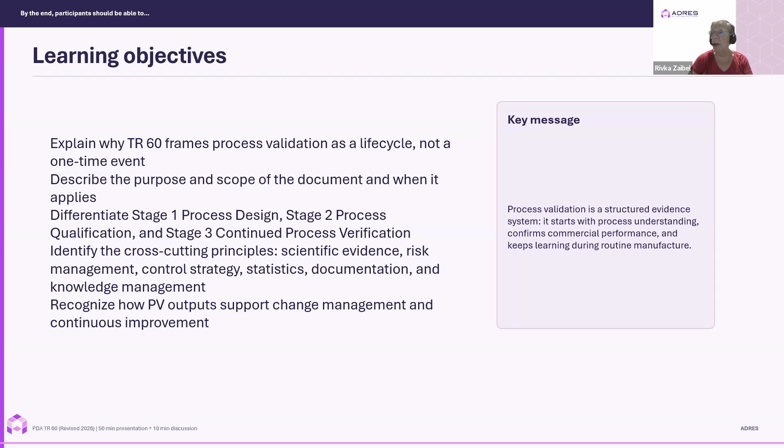So process validation is, as you know, a structured evidence system. It starts with process understanding, confirms commercial performance, and keeps learning during routine manufacture. Those who are working in startup companies are most probably in stage 1, and as you continue the development of your product towards the submission, the approval of the product, you will go through stage 2 and then to stage 3.

The main objective of the technical report is to provide the pharmaceutical industry with the most current guidelines available and summarize in a very detailed document the principles of process validation through the life cycle of the product. As a reader, you can find the most relevant regulatory requirements and expectations. You don't need to read all 162 pages of the guideline in order to get answers to your questions and needs at different points. So I, for instance, was interested to understand what the statistics section talks about. So I looked for that and reviewed it.

If you are in early stages, then you will benefit from reading the sections that are relevant to early stages and then continue through the entire process. Of course, in order to get the technical report, you need to be either a member of PDA or you can buy it online.

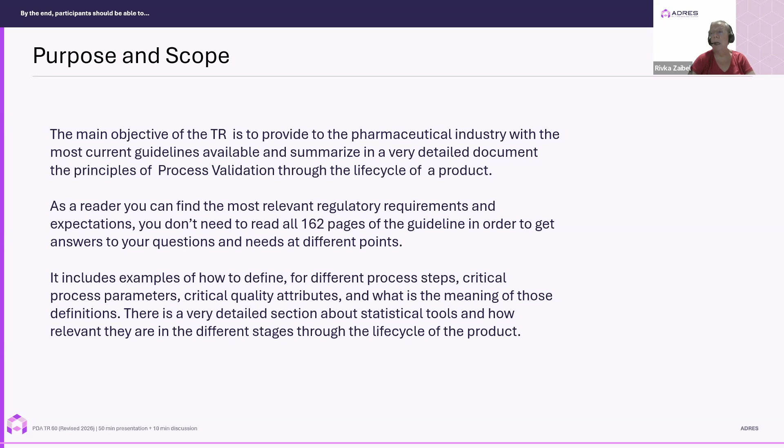There is a very detailed section about statistical tools and how relevant they are in the different stages through the life cycle of the product. So as I said at the beginning, it is the exercise which will be with you through the entire life cycle of the product. Here is a list of the documents which were summarized and that the technical report addressed, and they are the basis for this very detailed technical report.

As I said, you have here documents from the EU, like Annex 1. Those who work in aseptic processes are very familiar with Annex 1. We have the Annex 11, which is about computerized systems, and the equivalent FDA guideline, the 21 CFR Part 11. FDA guidance on data integrity and compliance, quality guidelines by the ICH, and we will see reference to the ICH guidelines through the entire document because that is really one of the main bases for this document.

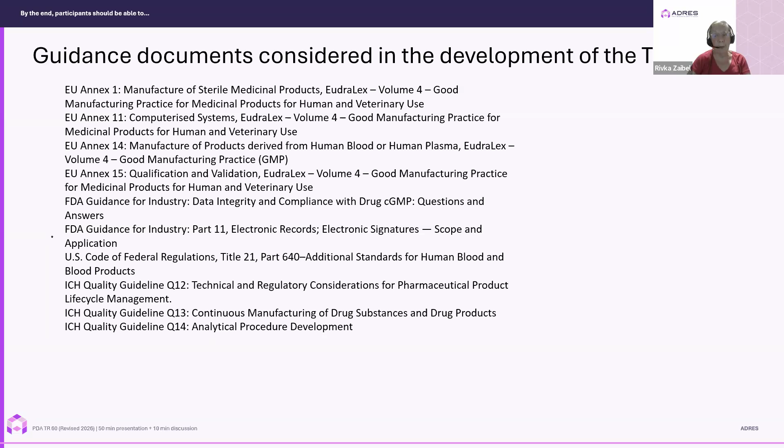So why does process validation matter? Why do we need to worry or actually understand what it is and what it says? So first of all, the regulatory expectation. EMA, FDA, and other regulatory authorities consider process validation an essential element in assurance of drug quality and link it to GMP expectations. Patient protection. What PV does is it connects process knowledge and controls to the ability to consistently deliver the intended product quality. And the business value: a life cycle PV creates a disciplined basis for innovation, improvement, and post-approval change.

So those that are in the industry, like myself, more than 30 years, we were used to the idea of 3 consecutive batches pass, that means that your process is validated. And actually that changed with the guidelines of the FDA and EMA in 2011, around that time, when they said 3 batches is not enough. 3 batches may give you an idea of the consistency of your process, but that is not enough in order to consider the process to be validated. And therefore, now we are moving to control and continuously verify the process.

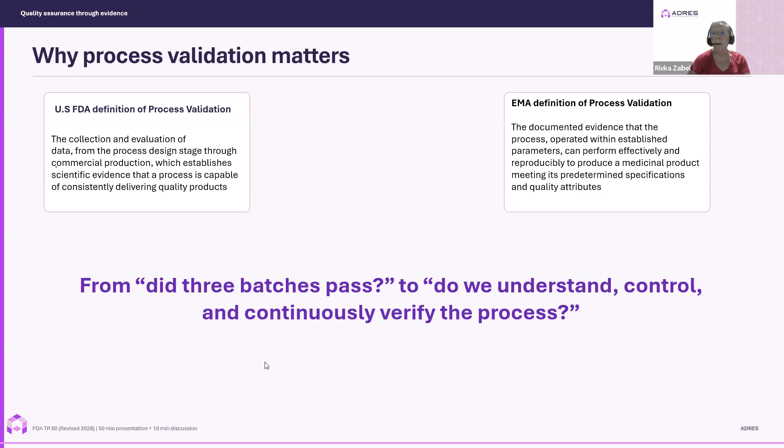And if we collect all the data through the development, the design stage, through commercialization of the product, I believe that we will be able at the end of the process to say, yes, I understand my process, I understand my product, I have the correct controls, and therefore I can move forward with the product to the market and ensure that that product will be safe to the end users, which usually are patients.

The purpose and scope of TR60 is it's a global reference for PV lifecycle, process validation, approaches for drug substance and drug product manufacturing. It applies to new and existing commercial processes. There is a section about how you apply the principles of process validation and continuous process verification to processes which were developed before those requirements existed.

And it applies to sterile or non-sterile pharmaceuticals, biologics, API, radiopharmaceuticals, veterinary medicines, and drug constituents of combination products. It is not intended to replace specialized validation guidance for ancillary operations such as cleaning, aseptic process simulation, or sterilization.

One of the things that we focus on when we assist a client to develop the process validation protocol and studies, we also add a list of what we call additional process parameters that need to be validated, which are not part of the typical process validation. For instance, as it is mentioned here, the aseptic process simulation, it's only relevant to aseptic processes, meaning a process in which you manufacture your product in aseptic conditions without having a final sterilization.

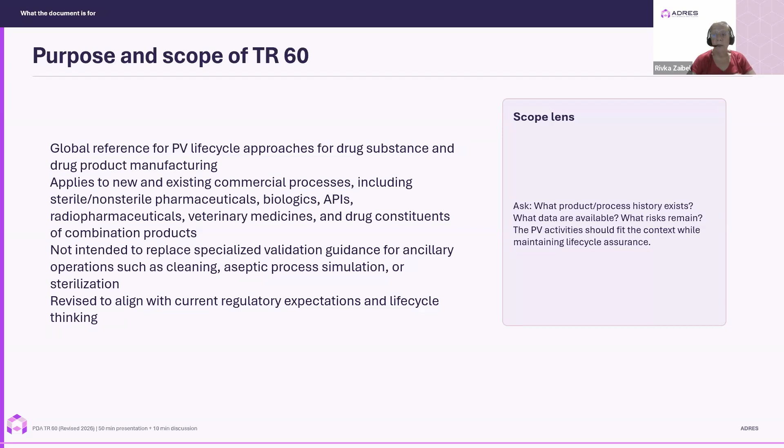The document was revised in order to align with current regulatory expectations and life cycle thinking. So some definitions: the process validation, PV, is a collection and evaluation of data from process design through commercial production to establish scientific evidence of consistent quality. CQA, critical quality attribute, that should be within an appropriate limit, range, or distribution to ensure

desired product quality. Critical quality attribute also is a quality attribute that if it is not within its range or distribution, it may adversely affect a process parameter. So, and vice versa. Process parameter whose variability can impact a CQA and therefore should be monitored and controlled.

It means that if I have a process, and I have an example from an audit that we conducted recently to a manufacturing facility. They defined that the pH of the fermenter is a critical process parameter, meaning that the fermenter during the fermentation stage should be at a specific pH range. And therefore, the pH is a critical quality attribute.

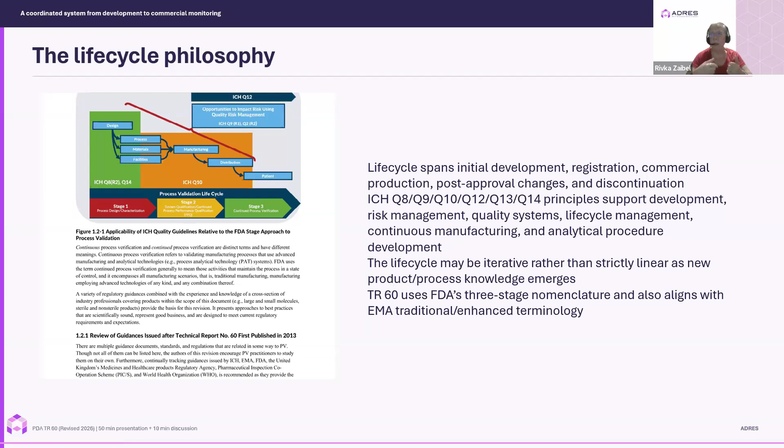So the TR60 uses FDA 3-stage nomenclature and also aligns with EMA traditional enhanced terminology. And we will go through each one of the stages and understand what they mean and what they include. So stage 1 is the design and understanding of the process, establish critical quality attributes, critical process parameters, critical material attributes, and the control strategy.

Stage 2 is the development of quality systems and confirm the commercial process through PPQ. When I say the definition of the quality systems, I mean that at this stage, when we get to stage 2 and we want to initiate the process performance qualification, we need to be at the stage of full GMP, because those batches that I manufacture through the PPQ are batches that potentially should go to commercialization, or definitely will serve for the clinical studies if you want to have some advantage of manufacturing batches for a purpose.

Stage 3 is the stage in which you monitor routinely your manufacturing process, your outcomes, your analytical methods parameters, and respond to signals to maintain control. And when we get to stage 3, we will talk a bit more about respond to signals. What does it mean?

So let's start with process design. During the process design, I want to establish quality target product profile and identify critical quality attributes, define the manufacturing process and process description, development of qualified, validated appropriate analytical methods, and through all that, use of risk assessment to identify potential critical process parameters and/or materials, and the range within which I can operate in each one of the process steps.

One of the things that I emphasize is that risk assessment is a key tool in order to develop the manufacturing process and also to keep the manufacturing process under control. And you should use that from the beginning of the design of the process. Start with the risk assessment of your initial process and then add more parameters and more knowledge to your risk assessment as you continue the development of the process.

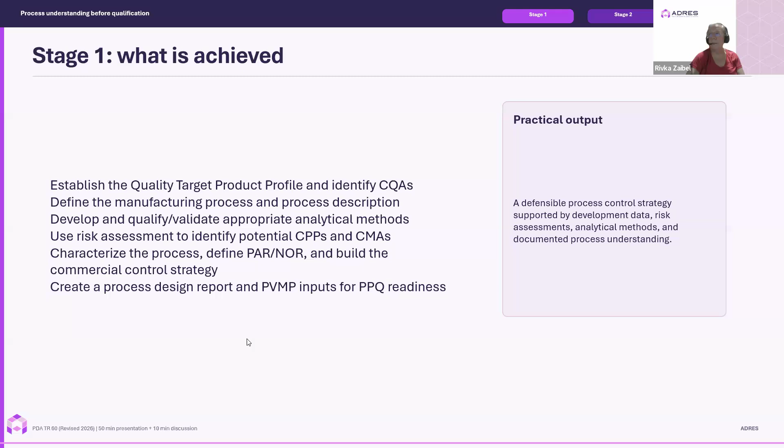At the end of stage 1, we should create a process design report and develop process validation master plan inputs for PPQ readiness. So we start with quality target product profile, and we end with critical quality attributes and a control strategy. The QTPP is based on ICH Q8. It considers patient needs and reflects the core quality information.

It talks not only about the quality attributes, but also how the quality attributes interact with, for instance, the indication of the product that I'm developing, the target population that will benefit from that product, the way of administration, whether it is a product for injection or an oral delivery product or a topical product. All those parameters actually help me to define what are the quality attributes that I need to have in hand in order to ensure that the product parameters can be met by those methods that I develop and the ranges of the limits that I will establish.

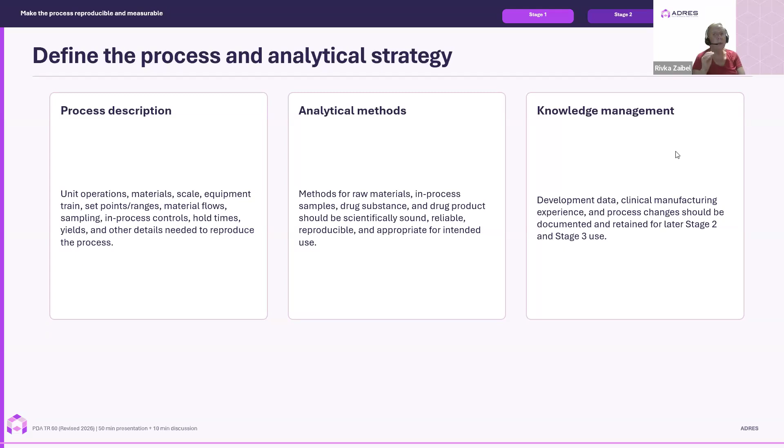All those things need to be understood during stages 1 and 2, so that when I get to stage 3, I have the database with robust data, with statistical tools that will help me understand what are those parameters which I need to follow in order to keep control over the process and the product.

Risk assessment I mentioned already, and I am coming back. Risk assessments are interdisciplinary and iterative. Parameter designations should be clearly defined and consistent within the organization. If variability in process parameters could impact a critical quality attribute, it is treated as a critical process parameter. The example that I gave before about the pH, that is the meaning of that.

If there is a process parameter that if I change its performance, the quality attribute will change because of that, or I will not get at the end of the day a product that meets its specifications, then it means that this is a critical process parameter and I need to ensure that it behaves as it should. Risk assessment outputs guide process characterization, PPQ, sampling, and continuous process verification monitoring.

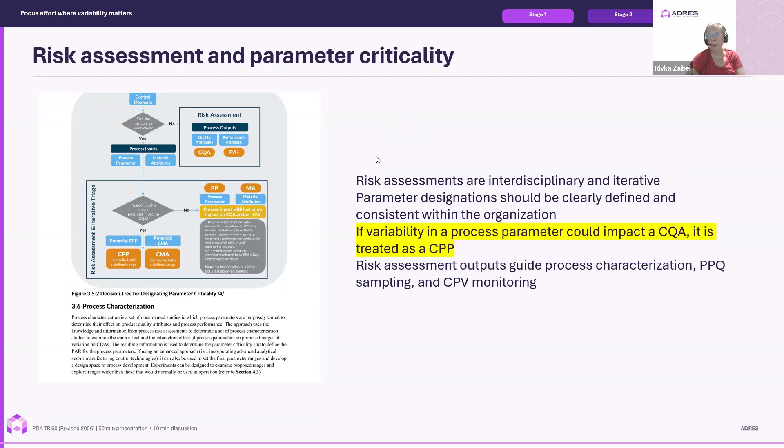So if through the risk assessment, I identify a process step which I still don't have control over its performance, this is a process parameter that I will continue to follow up on through stage 3 until I have established a robust and consistent outcome at this stage.

Process parameters should be varied during the design of the process in order to understand the effect on product quality attributes and performance. During the design, there is the term design of experiments and design space. That means that you develop a series of tests by which you challenge different process parameters and different quality attributes. And once you have compiled all the data, you can define what are the parameters and the ranges by which the process is effective and can be performed. That is the design space.

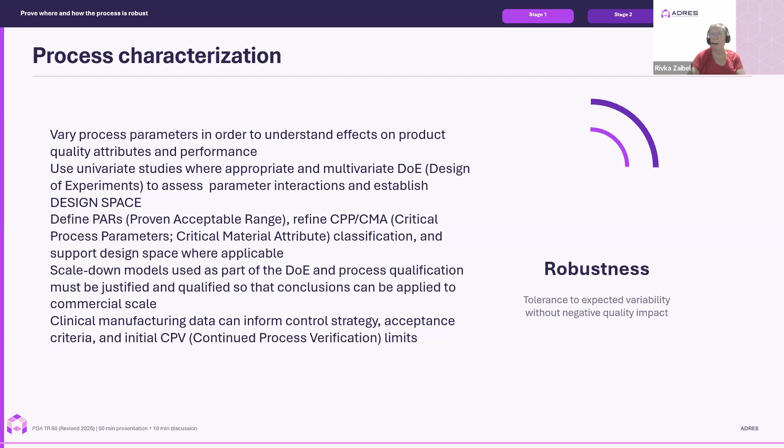And as long as you manufacture your product within the design space, you know that the outcome will be a product that meets its acceptance criteria. So you need to define also the proven acceptable ranges and the critical process parameters and material attributes during that process.

So at the end of stage 1, the deliverables for PPQ readiness are a quality target product profile, which you started with at the beginning of the design process, and you may adjust it once you end this stage 1 process with additional information and knowledge that you have gathered. The critical quality attributes and criticality assessment, manufacturing process design, process deviations, and relevant CAPAs implemented. That is actually not so much from the guideline, that is from our experience.

There are companies that initiate the PPQ without looking back at all the batches that they manufactured until that stage, which served for preclinical and clinical studies, and at deviations that happened during the manufacturing of those batches.

And we had an experience with a company that started the PPQ, and the first PPQ batch failed in one of the purification steps. When they looked back, they realized that during the manufacturing of the clinical batches, they had a similar deviation for which they didn't define the correct CAPA, and therefore they didn't resolve the problem, because they thought they had that deviation once in the clinical batches, so it's not such an issue. But unfortunately, it repeated itself during the process qualification, which was a challenge to justify.

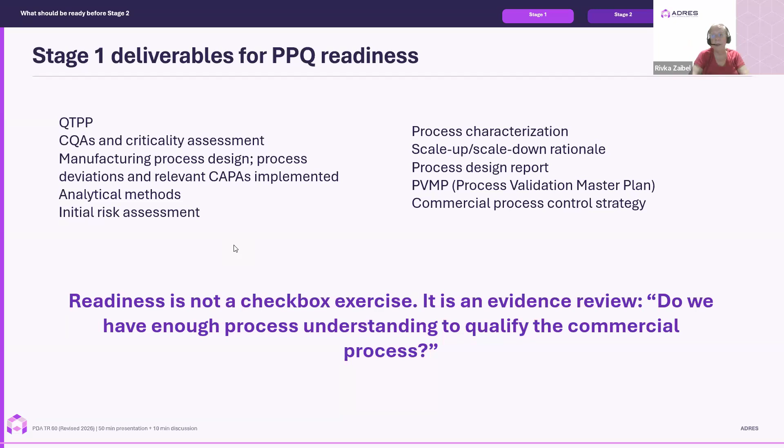A process design report, and you need to develop a process validation master plan, which will be with you from that moment through the life cycle of the product, and commercial process control strategy. So readiness to PPQ is not just a checkbox exercise, it is an evidence review. Do we have enough process understanding to qualify the commercial process?

Now we are moving to stage 2, which is the process qualification. Everything that is part of the process qualification should be already qualified and ready to move forward. Facilities, utilities, equipment, instruments should be suitable, capable, robust and reliable in order to be qualified before the PPQ. The qualification reduces equipment performance as a process variable. And that is a justification why you need the qualification, but also it is a requirement.

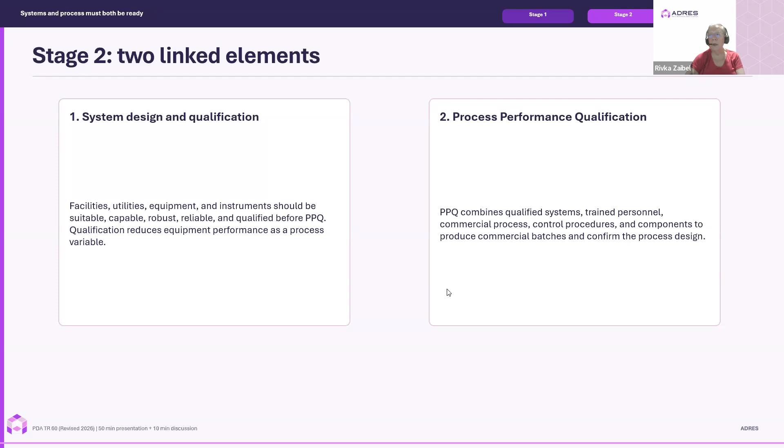You cannot move to PPQ before you have all your equipment fully qualified, and I will discuss what it means to have the equipment fully qualified. Process performance qualification combines qualified systems, trained personnel, commercial process control procedures, and components to produce commercial batches and confirm the process design. You need to have in mind that when you move to the process qualification, in theory, those batches can be your first commercial batches. So you need to ensure that they meet all the requirements of a product that goes to the market.

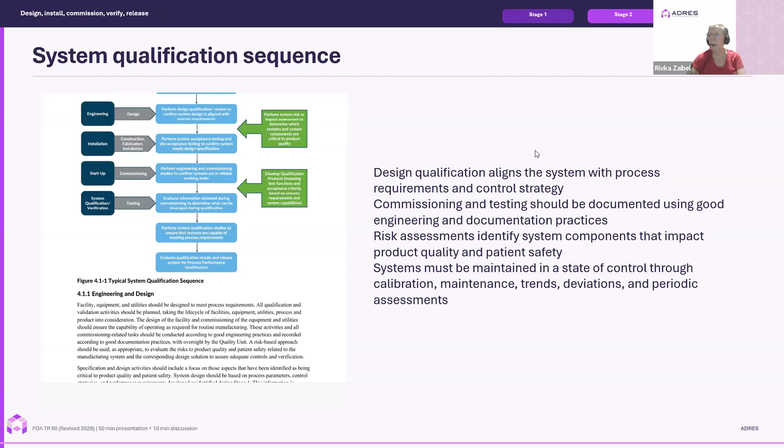Design qualification aligns the system with process requirements and control strategy. I will move forward because I have 2 slides that are a bit more detailed. Design of a facility and qualification of utilities and equipment. This is a prerequisite to enter into a process qualification.

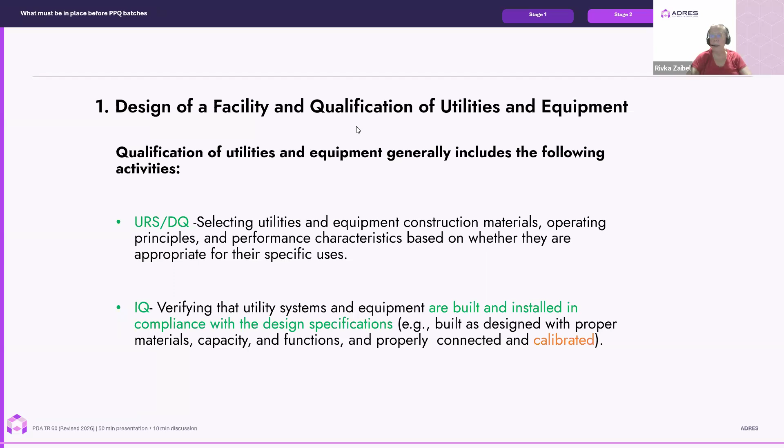Qualification of utilities and equipment includes generally URS, user requirement specifications, DQ, design qualification, IQ, installation qualification, at which stage you ensure that the utility systems and equipment are built and installed in compliance with the design, and that all the equipment is calibrated. OQ, operational qualification, verifying that utility systems and equipment operate in accordance with the process requirements in all anticipated operating ranges.

This should include challenging the equipment or system functions while under a load comparable to that expected during routine production. It should also include the performance of interventions, stoppage, and startup as is expected during routine production. Operating ranges should be shown capable of being held as long as would be necessary during routine production.

So if I have equipment whose purpose is to keep the product at a certain temperature for 10 hours during the process, then I need to challenge that equipment during the qualification phase, and you can do that with water or some other solution that reflects your product. And you need to ensure that for at least 10 hours the temperature is kept as you have defined, and there are no fluctuations in the temperature, which is for this step a critical process parameter. Qualification of utilities and equipment should be covered under individual plans as defined in the VMP.

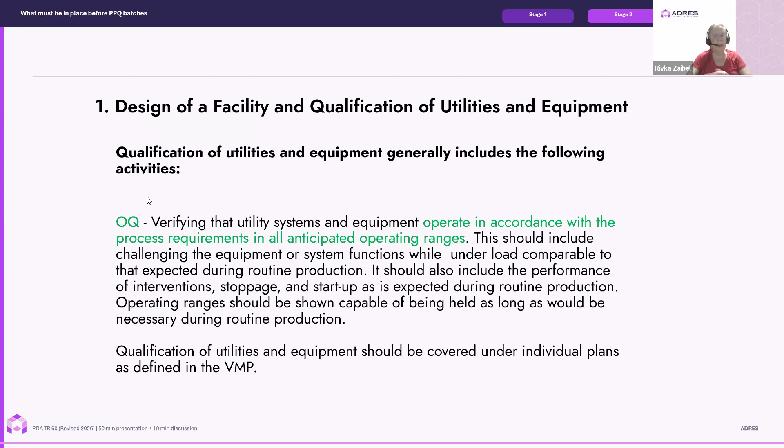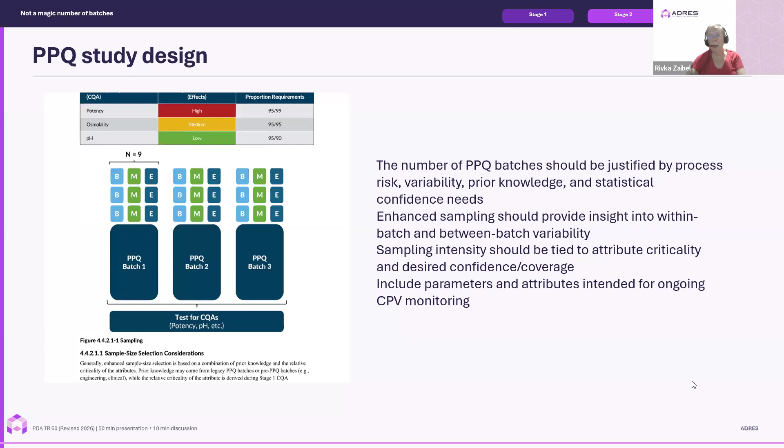That is an important aspect that you need to take into account, and that is being discussed also in the technical report. Number of PPQ batches is something that you should justify. It's not 3 because that is what we had in the past. It should be justified. Enhanced sampling should provide insight into within-batch and between-batch variability. So you need to have a sampling plan that will be more than what you will do for routine batches that you will manufacture in the future.

You need to have a protocol that addresses... you should have a protocol that discusses the purpose and scope, study strategy, references, equipment, material, responsibilities, acceptance criteria, sampling, deviation, statistical analysis and reporting approach.

The execution is the manufacture of commercial scale batches using qualified systems, as we already mentioned, and most importantly, trained personnel, so that the operators that will run the process were trained, they have experience with the process, they have manufactured it already, they have been trained on the protocol, they have been trained on the batch record of the PPQ batches, so that you minimize the risks that something will go wrong.

And the report should summarize all the data, deviations, and conclusions. If there were deviations during the execution phase, you need to justify why you consider the PPQ to be valid and ready to transition to stage 3, continued process verification, and regulatory submission like NDA, BLA, MAA, depending on the product and the authority to which you are going to submit.

Continued process verification is stage 3, and what the technical report recommends is what FDA also has in its guideline for process validation, to divide stage 3 into 2, 3A and 3B, while the protocol for 3A actually talks about how many batches you will manufacture until you feel that you have a robust process that you can really rely on its results.

And then for stage 3B, you can continue monitoring the process, but you can reduce the control. You can change the strategy so that it has not so many requirements for monitoring, but you have identified the process is robust and that there are almost no variations in the way the process behaves and is executed. During stage 3B, you can also look at opportunities for improvement.

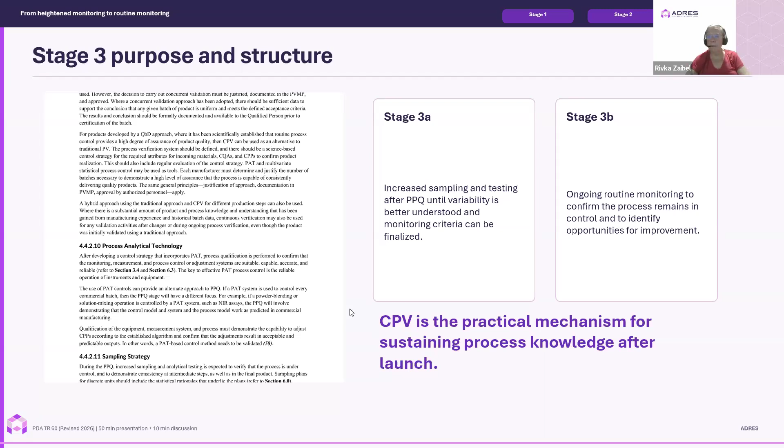For this continued process verification monitoring program, you need to define the roles and responsibilities across the different departments in the facility: manufacturing, quality, process development, analytical. Statistics is really, really important through the entire process validation and process verification.

And regulatory people also, because during that stage you may initiate change control and they need to provide you the input whether it is a change that can be executed without prior approval by the authorities, or that you need to ask for that approval before you initiate the change, or you need to provide the change protocol to the authorities in order for them to approve it, and then you can move forward.

So all the relevant departments in the manufacturing facility should be involved, including the marketing people. Sometimes we forget that if we make a change, for instance, it may result in delay in supply of the product after the change. So the marketing people need to be aware of that, and you need to plan that with them, although they are not directly related to the change control and the validation of the change, but they need to understand that there might be a delay in delivery of product to the market.

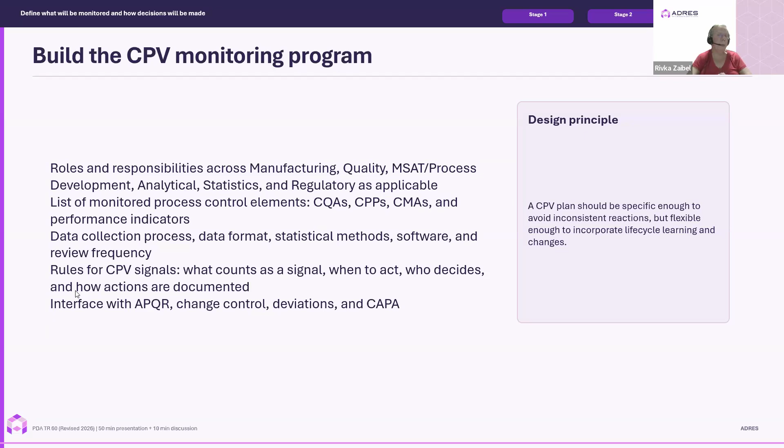Interface with the annual product quality review, change control, deviations. Each time that you do an annual product quality review, look at change control during the previous year, look at deviations, look at CAPA, and assess whether something in the process changed, whether there is a need to adjust the process, and therefore maybe to revalidate some aspects of that.

And an important aspect, or maybe the most important one, is the data science and the collection of all the information in order to understand how the product behaves. That aspect works against both overreaction to isolated points and under-detection of meaningful process drift. So you need to look at that and assess whether you really have an issue here or not, and how to react to that.

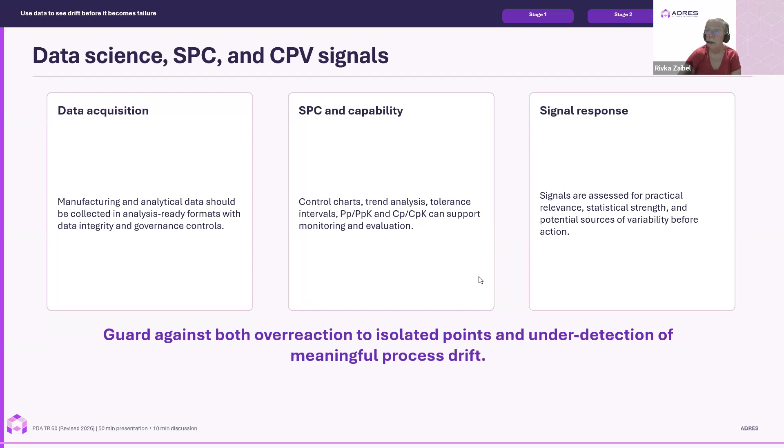And as I mentioned earlier, the 3A stage is the verification of the design space. You define how many batches you want to follow during that period. You may decide that all the batches manufactured during the first half year after the process qualification will be part of the 3A stage. And at the end of this stage, you will collect all the data and then decide whether you have the conditions under control, and there are no things that you need to address because the process is reproducible and under control.

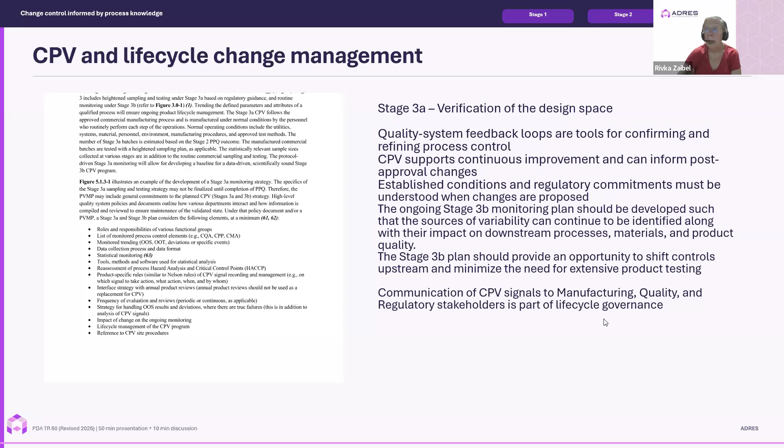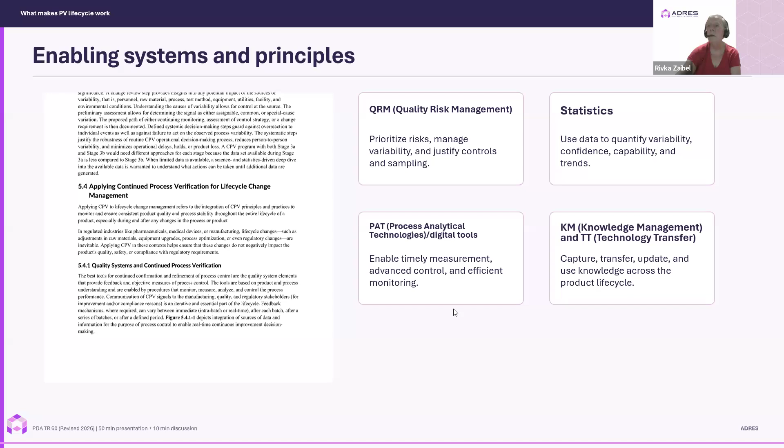And then you may move to stage 3B, in which you monitor the process, and you need to have a monitoring plan defined already, so that you have tools in order to continuously review your process. I think that we are at the end of the presentation, and we can summarize that. Here are some other systems and principles that will help you with the evaluation of the process: quality risk management, statistics, knowledge management, and process analytical technologies or digital tools that may assist you. And this slide actually summarizes all of that.

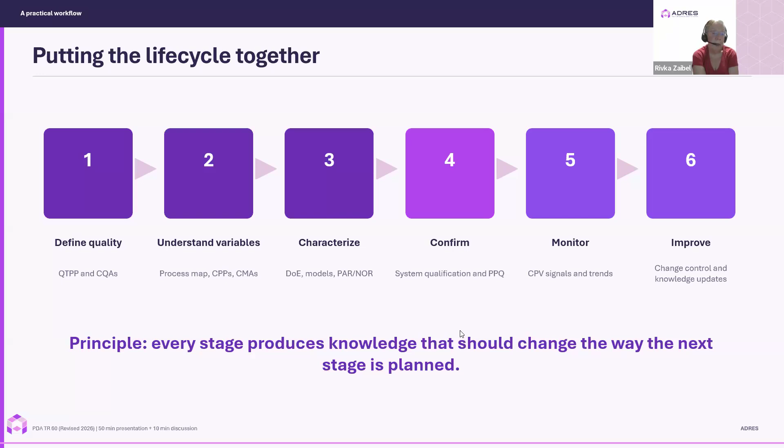We start with define quality, understand variables, characterize them, DoE models, PAR and NOR parameters, confirm system qualification, PPQ, monitor during the continuous process verification, and improve through change control and knowledge updates. So every stage produces knowledge that should change the way the next stage is planned, of course if relevant, and actually the challenge here is to identify the relevant knowledge and react accordingly.

So I think that I will stop here. I think that we covered everything. As I mentioned, it is a long document with a lot of information, and if you have the chance to have it and review those sections that are relevant to you and the operation in which you work, it will provide you with a lot of additional knowledge and aspects that are not always gathered in one document.